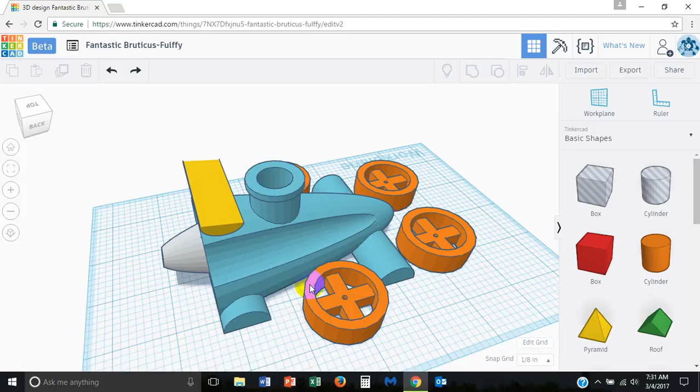In this video I'm going to show you a few things to consider as you're finishing your customizations and cleaning up your car. First of all, we notice that we have holes in the wheels for the nail to go through, but we do not have holes in the axles themselves for that nail. So we're going to need to do that in this video.

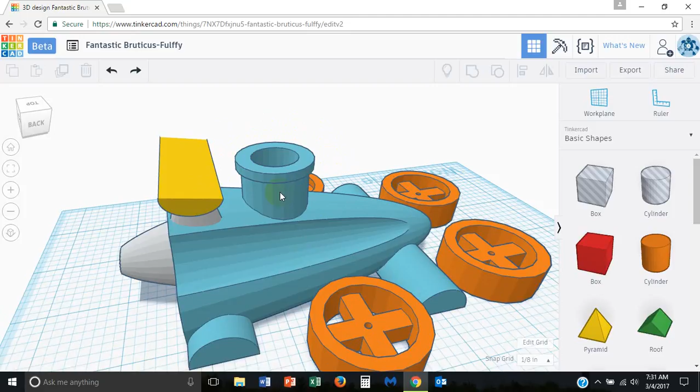Also, I was thinking that if I were to print this car and try to attach that balloon to this column, it would actually be rather difficult to attach in the back. This airfoil, as cool as it looks, could actually hamper the performance, or at least how easy it is to attach that balloon. So in reality, I think I'm just going to delete that.

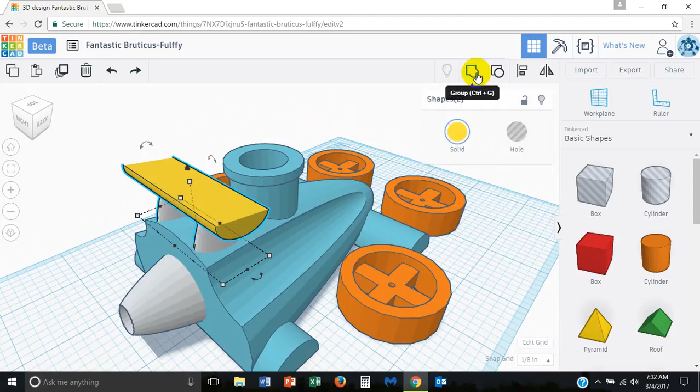Or some of you may decide, if you group it together, there could be a way to extend that out the rear of the car, just giving yourself more room to attach the balloon. So that actually wouldn't look that bad. In fact, it could look quite cool, especially if you could rotate something like that on your car and have it further out the back.

So that's a possibility. But do consider that you may want more weight near the front of your car. There already appears to be quite a bit of weight at the back already.

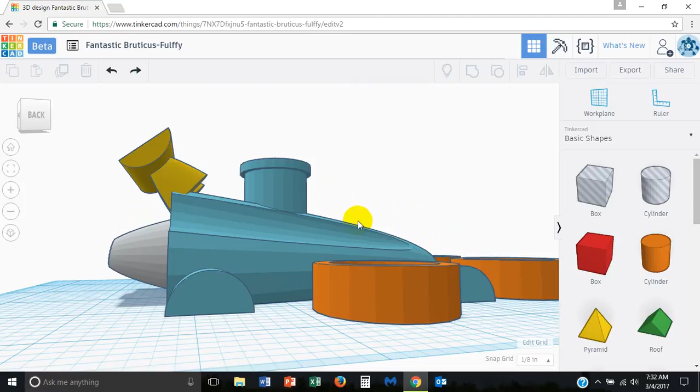With that said, in the next video we're actually going to make a driver that will sit right here. That will add just a little bit of weight to the front of the car, which would be helpful. Another thing you could do to add weight to the front would be to make the front wheels bigger, larger diameter than the rear wheels.

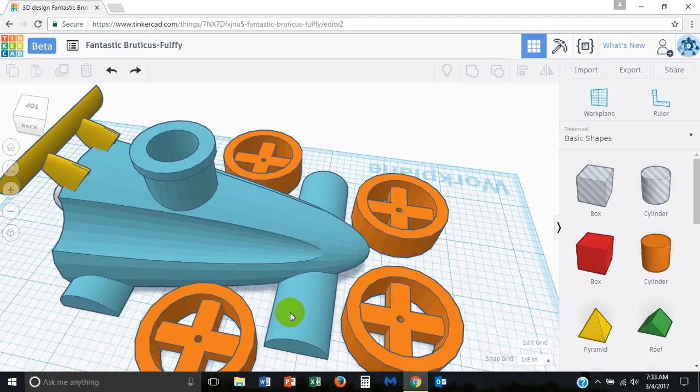But if you were to do that, you would need to raise the axle, raise the wheels up off the ground a little bit, because otherwise your car would be tilted backwards, which maybe would be a neat thing to do as well. But for now, I'm just going to delete this tail fin and leave it alone.

Okay, let's make the holes for the axles. To do that, I need this hole here, and I need to figure out what diameter that little teeny tiny hole is. I first need to ungroup one of these so I can get that hole. Control C, Control V to copy and just put it over here.

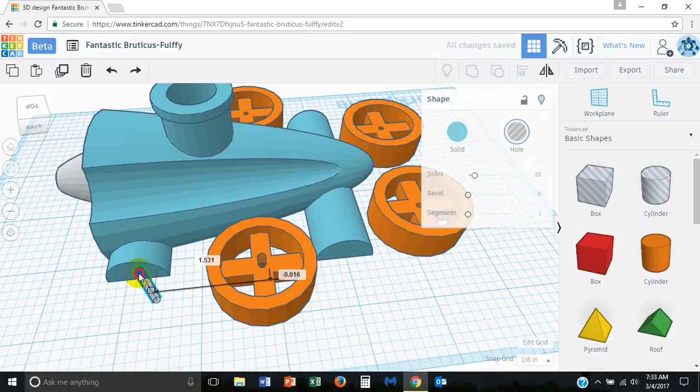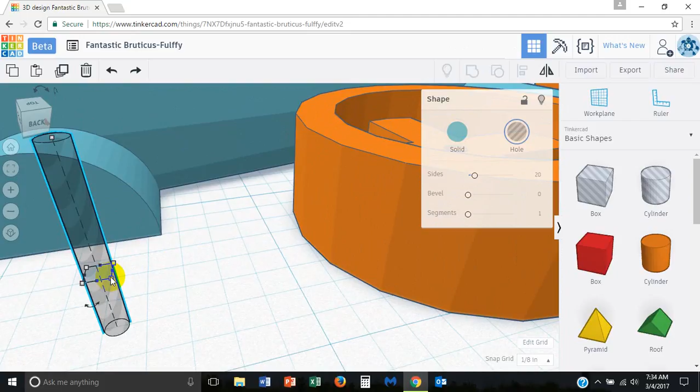Now immediately I'm just going to regroup those wheels so they're back to normal. So this is the hole going through the wheel. Now you can tell how big it is if you zoom in. It's 0.094. Now, this hole, the wheel should be spinning freely, okay, and the nail head...

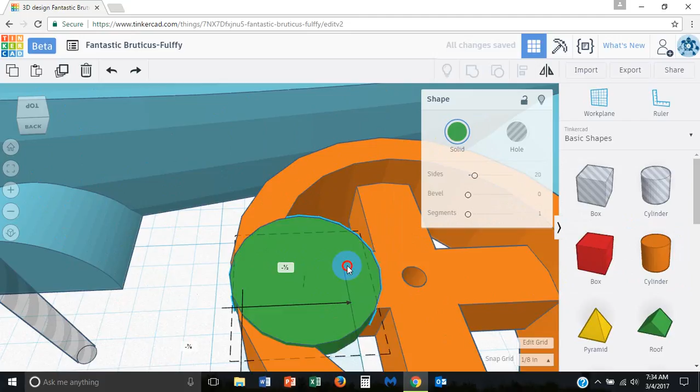Pretend like I'm going to pull out another axle, but I'll make it a different color just to prove my point here. Make this much thinner, as if it's a nail head. Bring it up — I should have made a plane. There we go.

So pretend that this is the head of the nail, and I'm going to change my grid. The head of the nail has to be wider than that hole. So if this was a nail going through the hole, the nail needs to be more narrow than this hole too, to allow the wheel to spin freely and reduce friction. If the nail was the exact same size as the hole, the wheels would not spin.

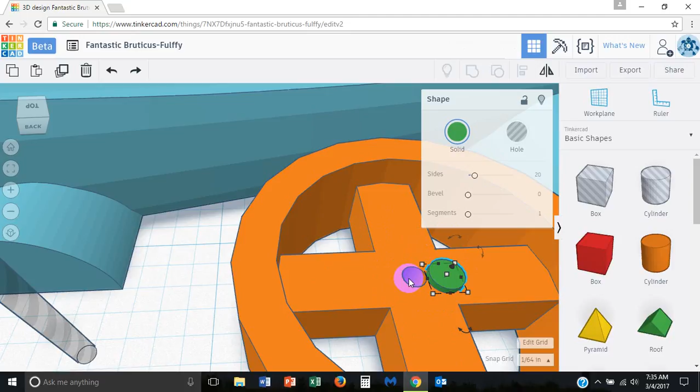However, in the side of the plastic car, you want the nail to stick and hold. So this hole does need to be smaller than the hole going through the wheel axles. This is easy to do — you just change your grid. I'm at 1/64, I could have just gone to 1/32. And I'm going to make this hole more narrow, like that.

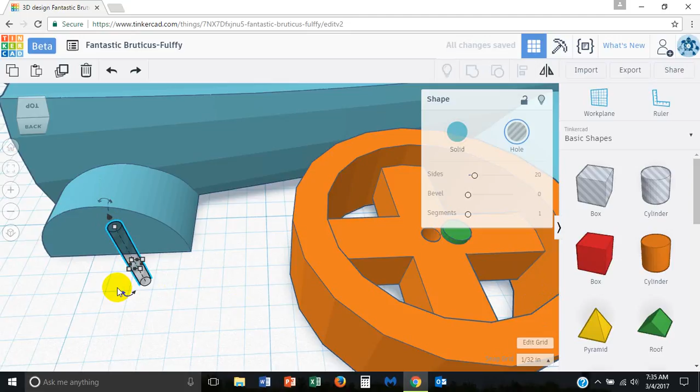So when we hammer in, when we tap or tack a nail into the plastic, it's going to stick. That's something we'll need to practice on. So I will print a practice car and give you these measurements prior to you printing your car, so you can make last minute adjustments, because we could also just stick glue into the hole and that would hold the nails, but it would be better if this hole was more narrow.

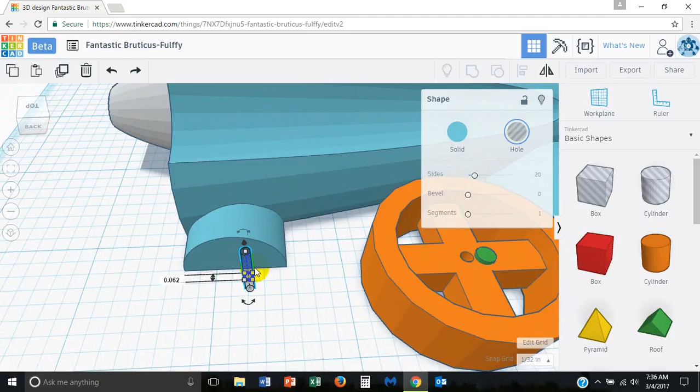Okay, so there we go. We have our little hole. This is smaller than this. I'm going to delete the nail head. Now we just need to put this cylinder into the axle horizontally. Okay, easy to do.

Hold the shift key down to rotate in 45-degree angles. And we want to center align this.

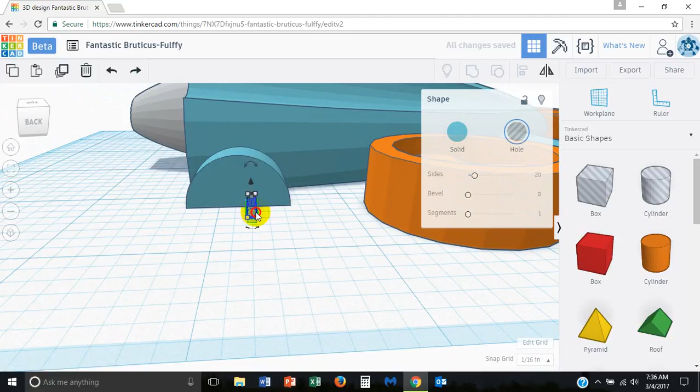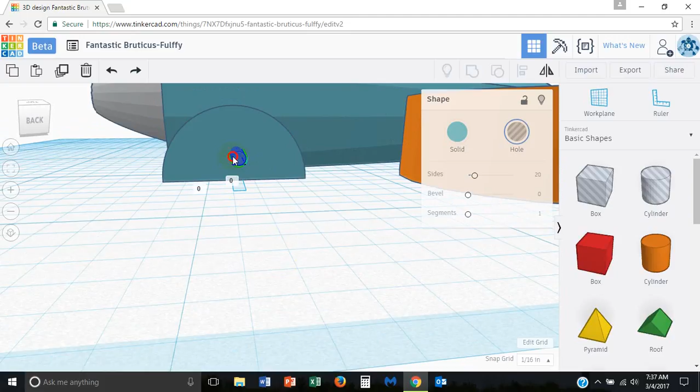Now here's the deal. You could ungroup the car, select this piece, go through that whole rigmarole. However, with the grid, with the snaps on, I feel fairly confident that this hole is close to center, and we don't really need to spend a lot of time making sure that it's centered.

An easier way to do it would be to simply pull out a box rather than ungrouping everything. Pull out a box, make the box the same width as that cylinder.

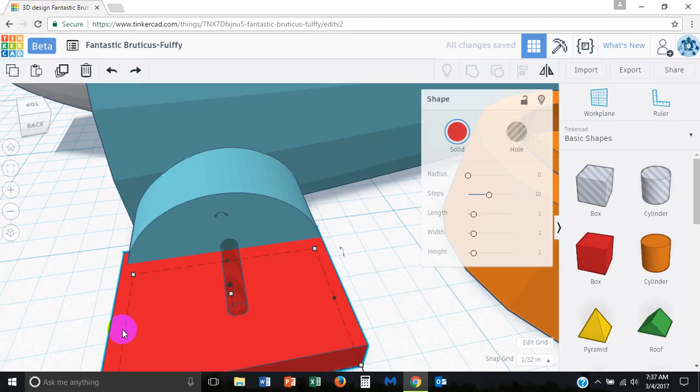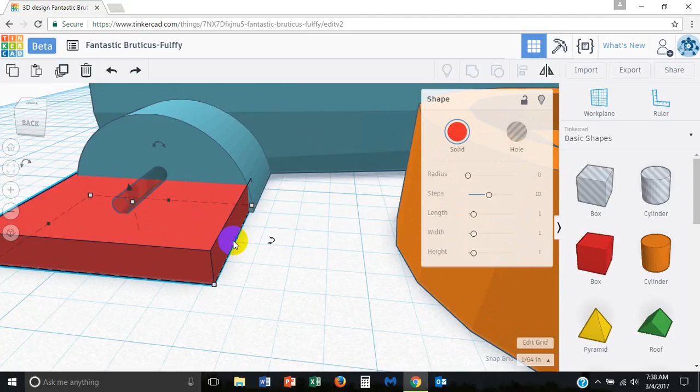This is going to be our construction line. Interesting, notice how that is not lined up. So I could, yeah, we still need to play with the grid some more. But you want to make it just perfect. There we go, that's pretty close.

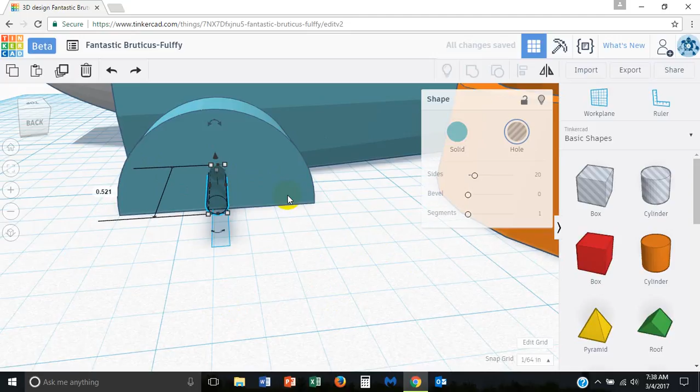Okay, and then you select the temporary construction box and your hole. Go to align and center. Boom, now it's centered. But really it didn't move all that much. I was close anyway. So then I'm just going to delete my construction box. And I know that this hole is pretty centered onto there. But we didn't need to do that again.

Okay, so I'm going to make the grid back to 1/16 or 1/8. And... nope, I don't want to do that because it just moved.

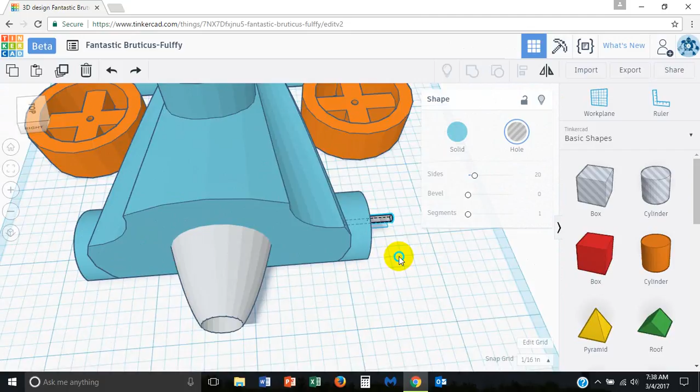Now this hole could literally go all the way through the car, and that's fine. I say that because remember that this hub, this axle, this rounded column goes all the way through the car, and you can see it right there. Okay, so that when the air comes out of the balloon and flows through the car, the air is not going to escape through this hole.

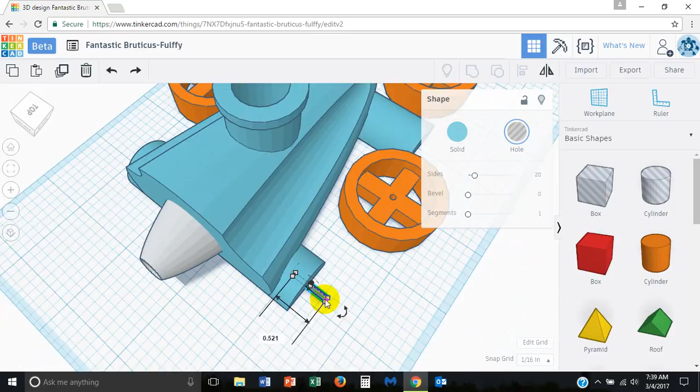So I'm fairly confident, fairly sure that I can literally just extend this column all the way through my car. Okay? So that actually saves a lot of work because all you need to do is just drag this all the way through the car. Let me grab it, it's kind of hard to do when it's this thin. Just like that. Okay, yay!

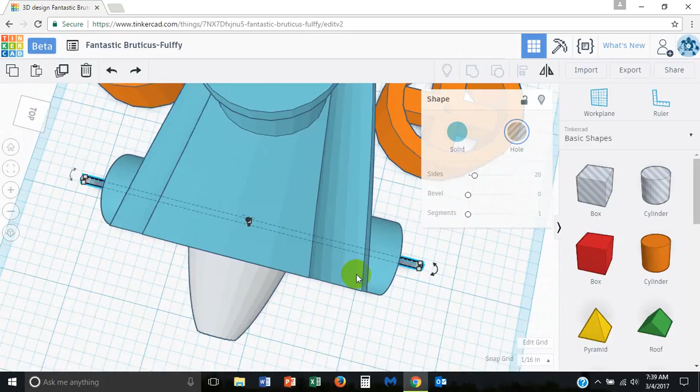Perfect, there's one hole. I'm going to Control C, Control V, put that at the front of the car. We'll try to line this in, Control Z. Boy, it sure is handy to have Control Z.

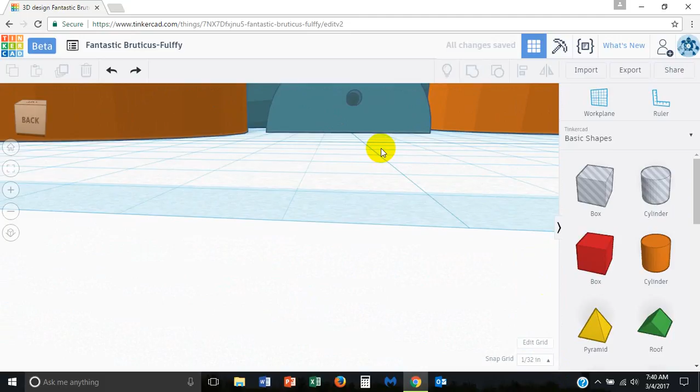Okay, I'll change the grid to 1/32. Maybe 1/64. I think that's pretty close. Again, I'm not going to be picky on that. Whenever you change the grid to make fine adjustments, I always immediately go back and change it again.

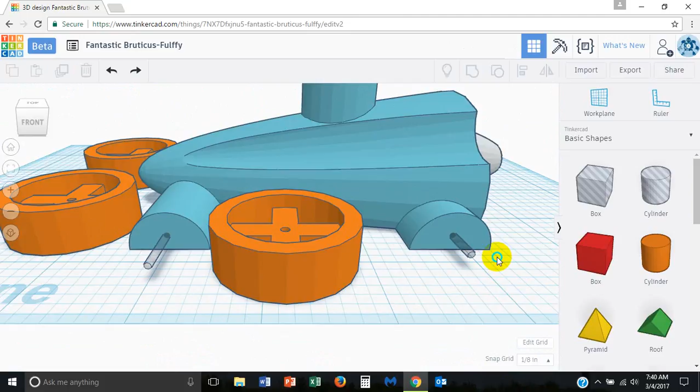Okay, and then all we have to do is, do you know what, group these to the car and you'll be ready to go. So select those, select the car, group. Group the holes to the body, wait a second. Great, so now we have holes where the nails are going to go, and we're ready to go.

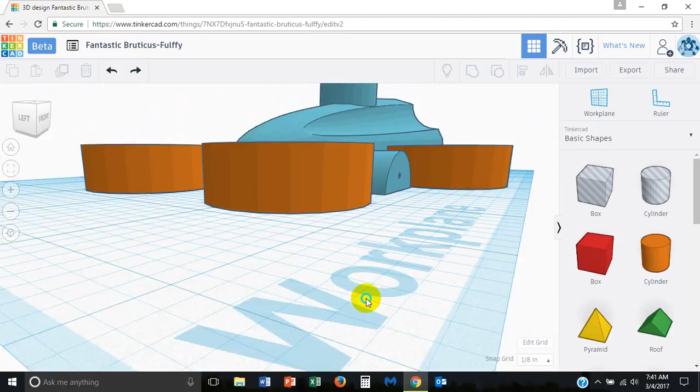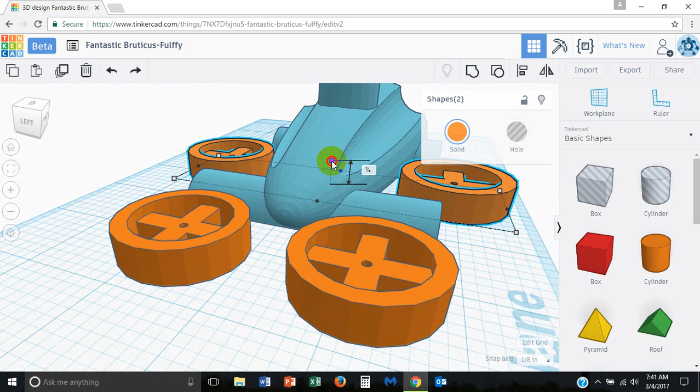One more thing I'm going to do is make a couple of these wheels just shorter. In fact, I think I'm going to do that on both. Now I'll leave one set of wheels a little bit... no, I think I am going to do those both. I think my wheels need to be more narrow. So you can always go back and make changes like that, but you need to make those decisions, those analyses prior to 3D printing your car.